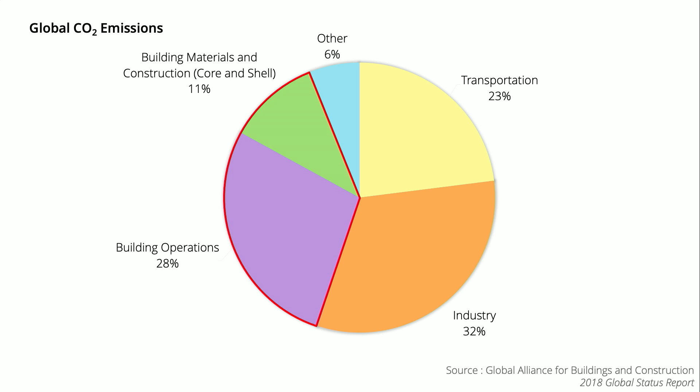The construction industry currently accounts for around 39% of carbon dioxide emissions annually, and 28% of that is operational, and 11% is related to construction directly. And tall buildings require a relatively larger amount of carbon in their construction than lower-rise structures. My question is, how can we justify that? What's the future of tall buildings? Is it reasonable to construct any more tall buildings, or should we consign them to construction history?

I'm going to talk through the history of tall buildings up to now, particularly since their explosion at the end of the 19th century. Then I'll discuss the technology of tall building designs now, and come back to this question with some thoughts about the future.

Tall buildings through history have been limited by the possibilities of the structural techniques available at the time. The pyramids in Egypt were the first man-made structures to break through the 100-meter height mark. The most famous were constructed in the 26th century BC, and the largest of them, the Giza pyramid, was 146 meters above ground level. More specific to the theme of towers, the Alexandria lighthouse was built around 250 BC and measured around 120 meters.

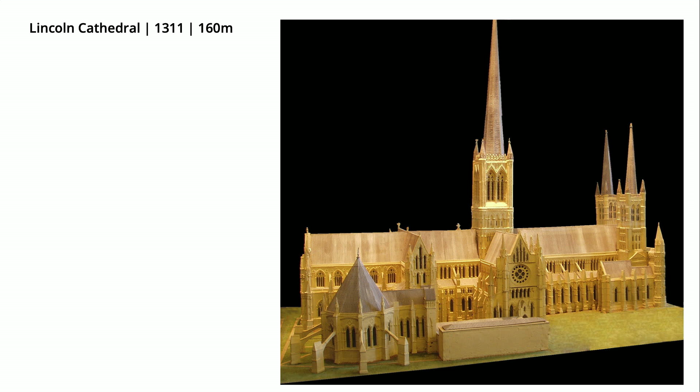It's not until the cathedral construction period of the Middle Ages that these heights were surpassed. And even after all this time, the towers were not radically greater in height from those built more than 1,600 years before. Lincoln Cathedral's spire, built in 1311, was reputedly 160 meters until it collapsed in 1548. Other spires followed around Europe around the same period, all around 150 meters high. Cologne Cathedral was the tallest building in the world at 157 meters in 1880.

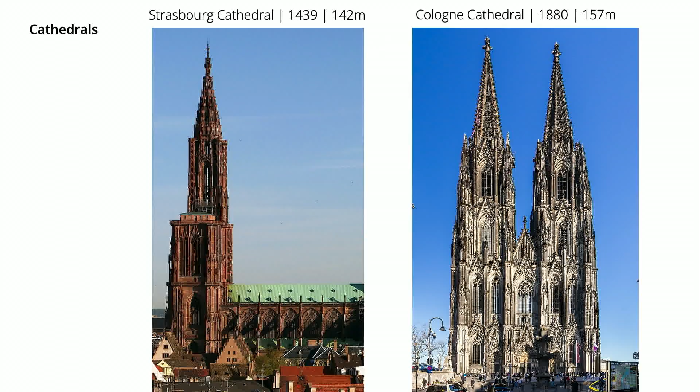And they're all built the same way: out of load-bearing masonry, stone blocks piled on top of one another to create walls. So they're heavy, and their height is limited by three structural factors: the capacity of the stone wall to support itself, the capacity of the ground beneath it to support it, and the stability of the entire structure against the loads acting on it, principally lateral loads.

A further factor limiting the height of any buildings was the difficulty for anybody to go up them. So they were used for power or status or as a beacon, but not for economic reasons, because not very many people wanted to or needed to go that far up into the air.

There were two technical transformations in the 19th century which transformed that. Elisha Otis is the famously known inventor of the elevator. He demonstrated, in the sort of mythology of the invention, a new safety hoist at the exhibition of the Industry of All Nations in New York City in 1854. He was standing on his hoist, the single rope supporting it was cut, and the platform dropped a few centimeters and then stayed where it was.

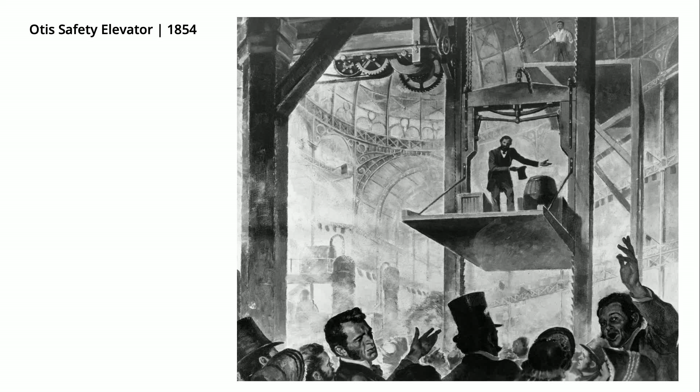So he'd invented a safety mechanism. Plenty of people used hoists before that, but they didn't like the safety implications if they broke. Popular history records this as the beginning of elevators, but the reality is more prosaic. Lots of people around that period were coming up with, using, and trying to invent elevators. Otis, the company, was one of them. Elisha Otis was the entrepreneur who had this one, but many others were involved too. The main point is that during this period, there was a frenzy of activity to fulfill an economic need for people to go safely up buildings.

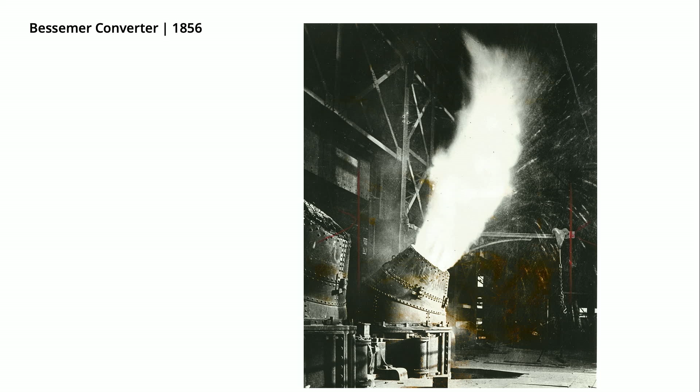The second major innovation of that period was the incorporation of structural steel into the load-bearing structure of buildings, rather than only load-bearing stones. Steel had been around for a long time before this, but the modern era was really invented by Henry Bessemer, who evolved a process, the Bessemer process, in 1856, which dropped the price of mild steel significantly, by a factor of more than 5, and enabled it to be produced more cheaply than wrought iron.

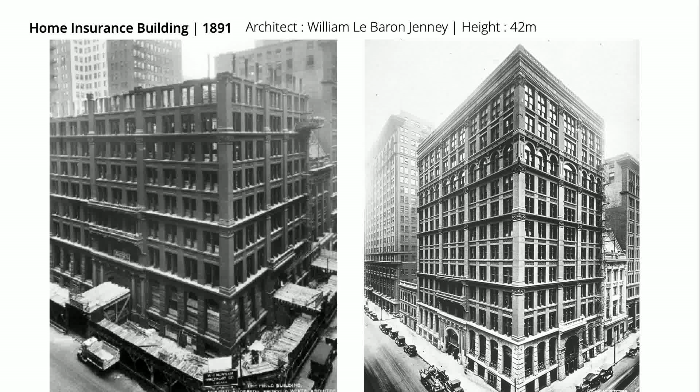And so that really transformed the possibilities of building. Those possibilities manifested themselves first in America, particularly in Chicago, and very soon afterwards New York. So instead of buildings using load-bearing masonry walls, as had been the case up till then, they started to be constructed as a steel skeleton.

So you'll notice that this gets called a skyscraper. It's 42 meters high. This project, the Home Insurance Building, is known as being the first skyscraper, and that's really because of the change in its construction method. But there's a debate about that, because you can see on the left those steels vertically pointing, just coming out of the top of the walls. There was still load-bearing masonry in this skyscraper. William Le Baron Jenney, the architect, built it in 1885, and then some other additions were made.

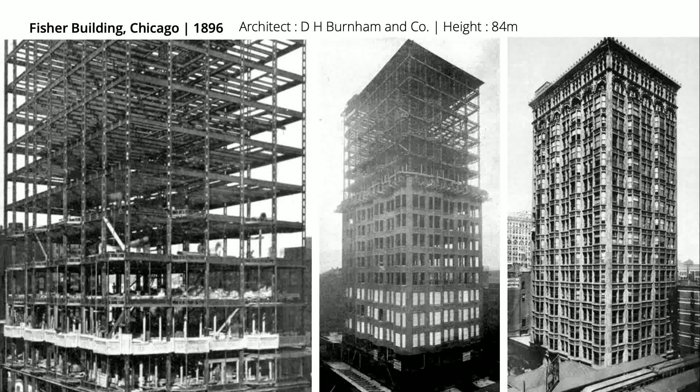But if we look at others around the same period, you can see clearly the fact that there's a steel skeleton, a frame, and then the cladding follows on. So that's a transformation in building technology — instead of building with load-bearing masonry walls, we're now building with a steel skeleton. Here's another one from the same period, the Fisher Building in Chicago, 84 meters, again with a steel frame, and this time plate glass and ceramic cladding.

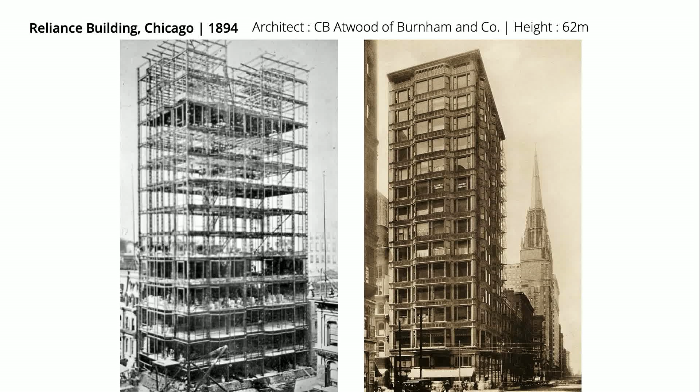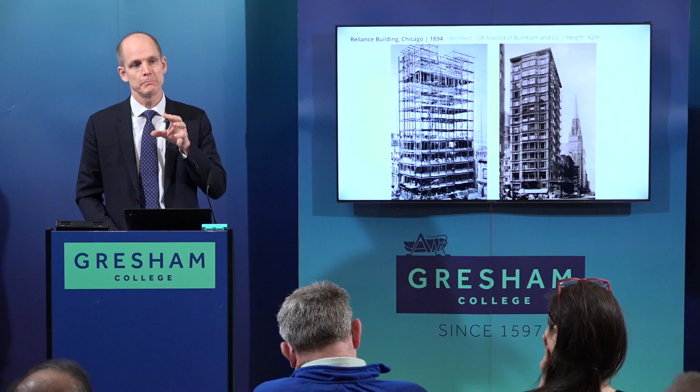So of course those are the technological means, but there had to be a reason for that, and there were very strong economic drivers in that period. Chicago and New York were growing extraordinarily fast, and land values were increasing very quickly. In New York, land values doubled between 1840 and 1870, and at the same time there was a big economic benefit in density and in staying close to the coast. In 1816, it cost as much to transport goods 30 miles inland as it did for those goods to cross the Atlantic, so there was good reason to stay near the coast.

So as quickly as tall buildings arrived, a philosophy of their construction and design was developed. This is a quote I really love from Louis Sullivan, a very famous architect, one of the pioneers of the modern movement and one of the most forward-thinking architects of his generation. He wrote a piece called 'The Tall Building Artistically Considered' in 1896, in which he said: whether it be the sweeping eagle in his flight, or the open apple blossom, the toiling workhorse, the blithe swan, the branching oak, the winding stream at its base, the drifting clouds, over all the coursing sun — form ever follows function, and this is the law.

That's how people wrote about architecture in those days, and we all really bear in mind that it's a phrase that has lived on ever since then. But it's just interesting to see where it originally came from.

Louis Sullivan built some fantastic skyscrapers, but form hasn't always followed function in the evolution of skyscrapers, or in fact other buildings since then. I'm not going to go through the whole history of skyscrapers, but suffice to say that's not always the case — there's not always a clear identity of the skyscraper with its function. Maybe the climate emergency is one way to recenter that, to measure the impact of departures from the most efficient structural response for a particular design.

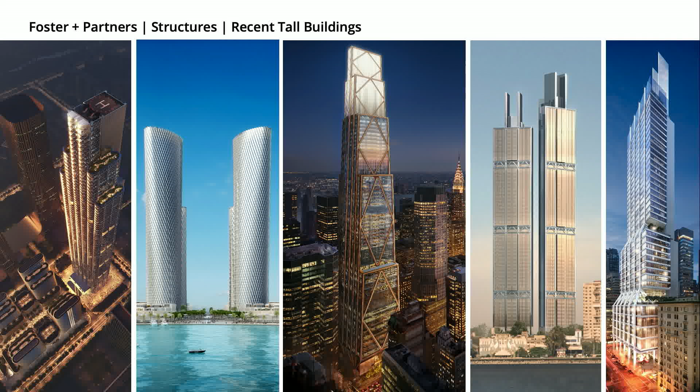So we've designed structures either at competition-winning projects or through to completion around the world, and I'm going to show some of the principles of tall building construction with some of those as examples. These are the Lusail Towers in Doha, designed by the practice and completed for the FIFA World Cup in 2022 in Qatar. They're four towers arranged in two pairs, 257 meters and 300 meters tall.

We build, in the structural team, cardboard models — this one is around a meter or so high. The idea of these cardboard models is they show the structure alone. We remove the cladding so that we just see the skeleton of the building, because we want to make structures which are logical and efficient and don't need to be hidden or have anything to cover them up. We want to see them and make them beautiful.

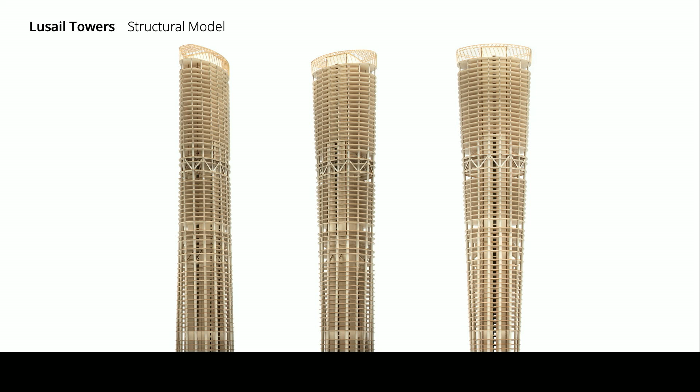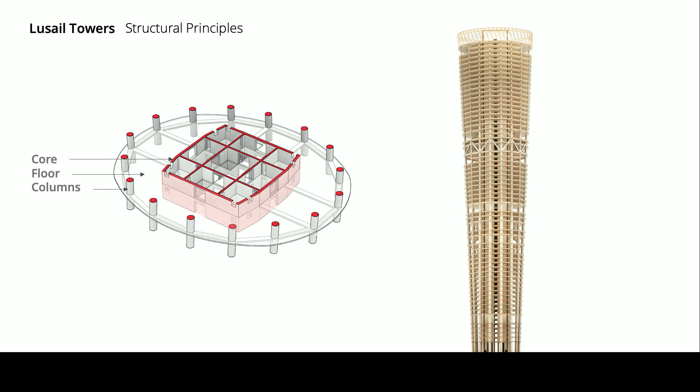If I focus on this tower, a tall building is a cantilever fixed at the base and subjected to both vertical and lateral loads. The vertical loads are primarily due to the building users, and the lateral loads are due to wind and also earthquake loads, the shaking of the ground, which is mostly horizontal. Those forces are carried down by the structure to the foundations.

The most common way to resist the lateral loads in modern buildings is by using the building's core. You can see in this axonometric section the core in the middle. This is the part of the building which contains the vertical circulation, the stairs and the lifts, and also quite often the spaces needed to put the mechanical services into the building.

But above a certain height of a building, somewhere between 150 and 250 meters—there's no absolute rule, it depends on the building structure and the loads acting on it—the core isn't enough. The building's too tall for that. At that point, we need to mobilize the outside of the building, using the full width of the building to resist the lateral loads acting on it.

This is one method used quite often, which is to install trusses, which we call outriggers, which link the core to the outside columns in order to get the full stiffness and strength of the columns around the perimeter.

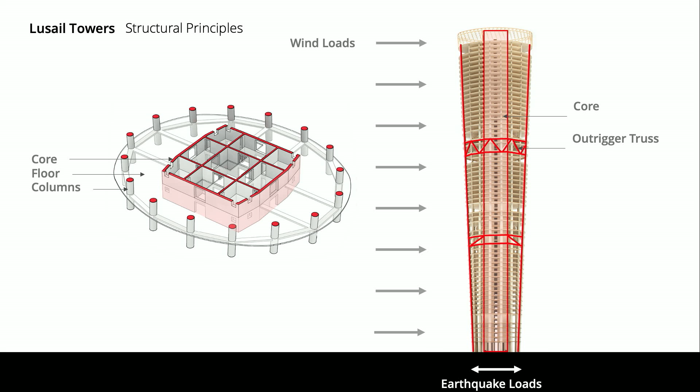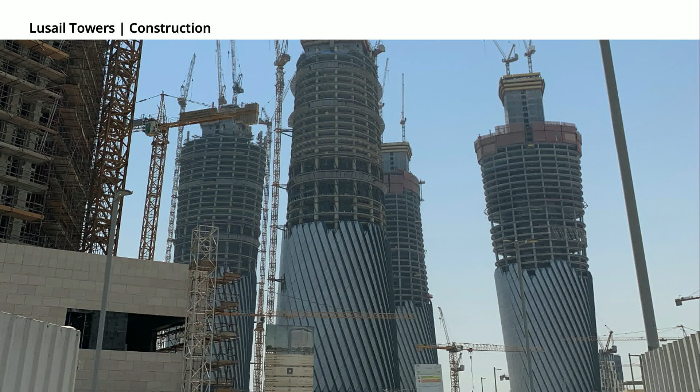So these are the Lusail towers under construction, and you can see on the right-hand side the core, built in reinforced concrete, coming out of the top of the towers, and then the floors and the columns following on.

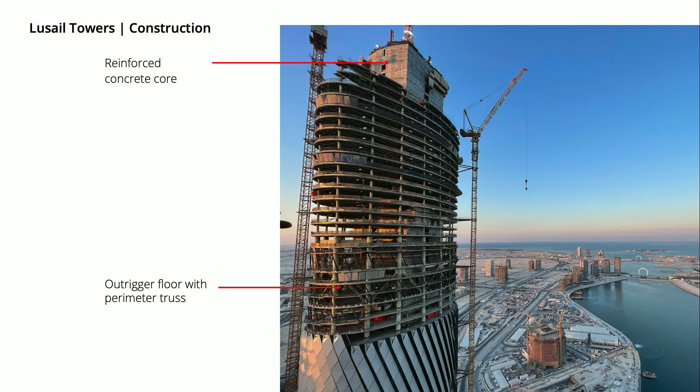So another tower now in New York, 425 Park Avenue. This is, as you can see, in Manhattan, just off the top of Park Avenue, quite near Central Park. This is a competition that we won in 2012.

Tall buildings in Manhattan are required to fit within a tapering volume defined in planning rules, which gets thinner over the building height in order to allow light to penetrate down between the buildings to the streets at ground level. As well as that, the client wanted to move the vertical circulation, the core of the building, away to the side rather than being in the middle, so he'd get a whole floor plate addressing directly Park Avenue, with the core pushed to the back.

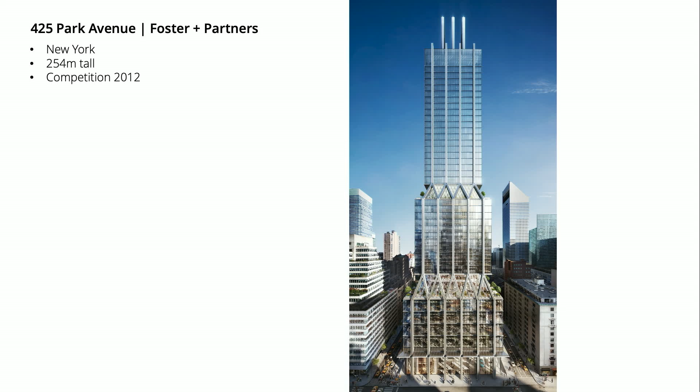A single line of columns, which I've picked out in red, starts at the top of the building, and it bifurcates twice. It divides into two, and it also goes back to the core behind. You can see at those two levels those diagonals. In bifurcating at those levels, the columns connect with the core behind.

You can see in the side elevation on the right-hand side that those diagonals are connecting back to the core. What that does is the same thing the outrigger was doing for Lusail Tower, which is connecting and mobilizing the full width of the building to resist lateral loads, which in New York—which isn't seismic—is particularly wind.

So I'm going to show you what that means in terms of the forces acting on the building and therefore the reacting forces inside the structure. On the left-hand side, you can see a side elevation, and in red are the compression forces coming down the columns on the front. The gray is the building core, and the red is the compression forces in the columns. You can see them gradually increasing further down towards the bottom, splitting in two every time they meet a bifurcation point. To the right of the cardboard model, you can see the overturning moment—the bending moment which the building has to resist when the wind blows to the side.

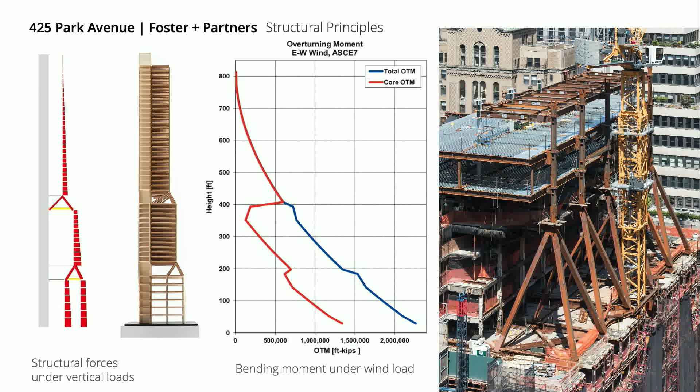So the wind is blowing, and the building, working as a cantilever, has to resist that load at the base. You can see that line starting at 0 at the top, up at 800 feet, and gradually increasing. The blue line shows the total moment, which reaches a maximum at the bottom, and the red line shows the moment being resisted by the core. About halfway up, particularly at 400 feet, those diagonals are effectively splitting the load between the columns and the core, so they're working as an outrigger. We found this a very exciting graph because it showed that our structure was working as we wanted it to—dividing the load between the core and the line of columns to make it efficient.

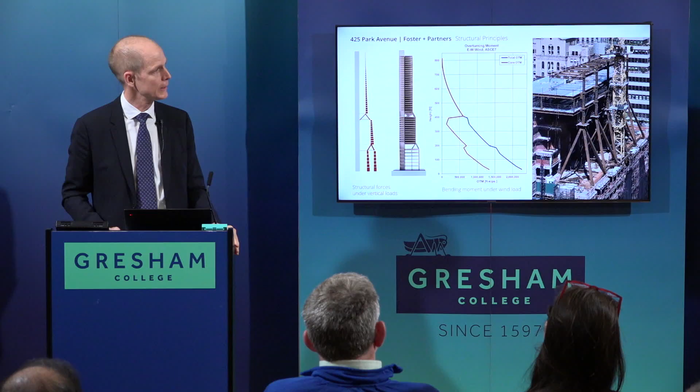It's always encouraging when a competition scheme is what actually gets built. You can see on the right-hand side the construction of the tower going up, with those columns bifurcating. This is the finished structure from the front—the first view you saw was a photo montage from the competition, and this is from the side. So again, to reiterate, we're looking for buildings where you could take the cladding off and the structure would look exactly the same as it looks from the outside.

The final tower that I want to show of ours is in Shenzhen. It's under construction at the moment, and it's 388 meters high, so one of the tallest buildings being built in Shenzhen at the moment. It has some associated buildings around it on the same site that we are also designing.

The stability for this building is provided by a combination of the core—the reinforced concrete core, which again is off to the side in order to achieve big usable floor plates, you can see that on the left—combined with external columns around the perimeter of the tower, which you can see immediately over to the right. Those are linked to the core, so there's a connection once again with trusses, which we've brought out—five lines of trusses and perimeter structure—in order to make a combined system to resist the loads.

And there's another part of the loads that need to be resisted in Shenzhen, which is true of a lot of the world but just happens not to be true in the UK or most of the East Coast of the States, which is that it's seismic. It has significant seismicity, and that horizontal shaking load imparts an enormous amount of energy into the building.

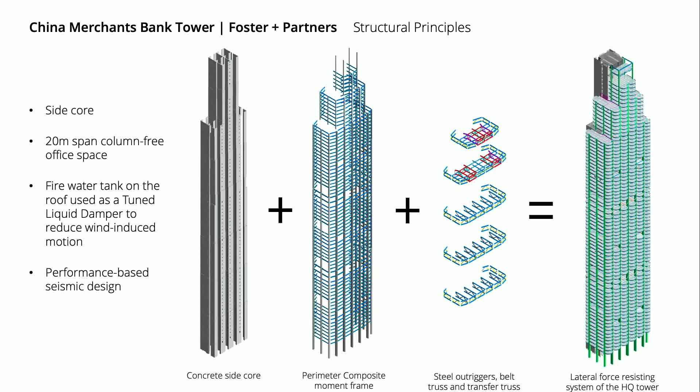So we've used a technology called buckling restrained braces, which form part of those trusses and absorb the load. Our ability to analyze towers now has really advanced substantially, and we can now do what's called performance-based design, meaning we can analyze the behavior of the building under specific earthquake events. This is a particular earthquake which has been modeled and then applied to the building, at a slightly exaggerated scale, so we can investigate the building's behavior under that load.

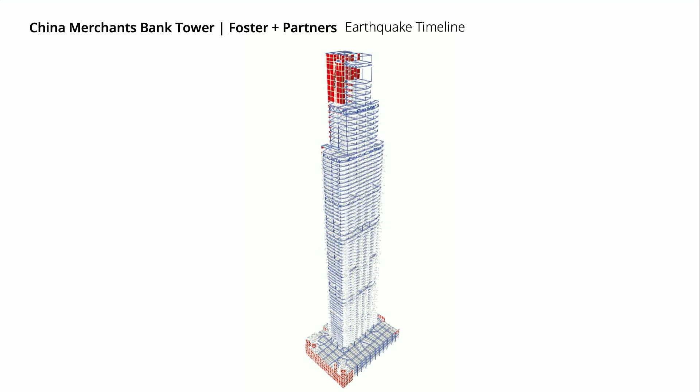And here the building is on site—you can see it on the right-hand side. Once again, the concrete core going up ahead, and the perimeter columns you can see being built, with the floors behind them.

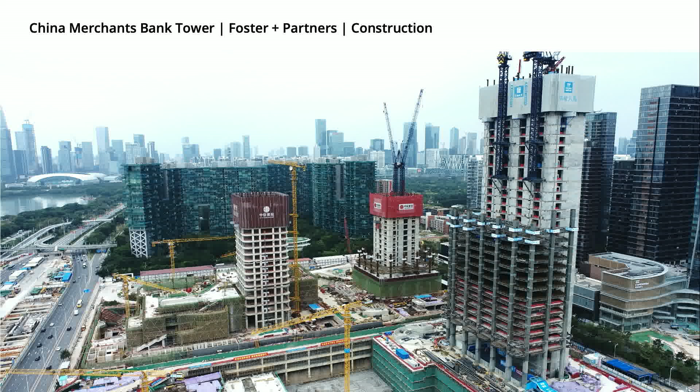So I want to now move back to the original question that I asked. That's a brief synopsis of the technology we use in our design approach to tall buildings, which is really our design approach to all buildings. The original question: how does the technical capability that enables buildings like this to be built fit with a climate emergency and our need to drastically, radically reduce the production of greenhouse gases? This is a debate which is ongoing in the construction community, and understandably, there are strongly held feelings about it.

Most carbon dioxide emissions result from the combustion of fossil fuels—not all of them, which is something I'll touch on—but most come through transport and industrial processes requiring high temperatures, for example 1500 degrees for the manufacture of steel or cement.

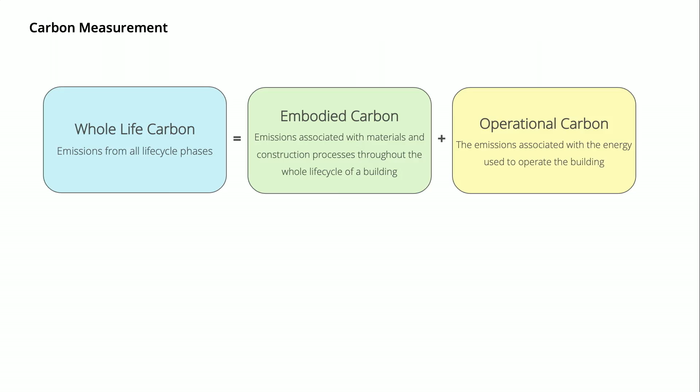We measure the whole life carbon footprint of a building as a combination of the carbon produced during construction, which is the embodied carbon, and the carbon produced during use—heating, cooling, lighting—which is the operational carbon. Improvements in operational carbon, like insulation and better power usage in modern buildings, have reduced operational carbon a lot. What used to be not so seriously considered, maybe 10, 15, or 20 years ago, embodied carbon has now become a much more substantial percentage of the overall carbon footprint of a building.

There's a second factor to consider when thinking about buildings: their users. This is a measure called the household carbon footprint, which is the impact of the building users—the greenhouse gas emissions required to produce, distribute, and dispose of all household consumption over a year. This is what economists use more often than the carbon definitions used in the engineering and architecture world of whole life carbon.

Here is an estimate of the household carbon footprints of residents, from a study of 31,500 zip codes across America. They haven't measured all of those individual users; they're using national survey data to predict consumption, taking various factors and predicting the average household's consumption.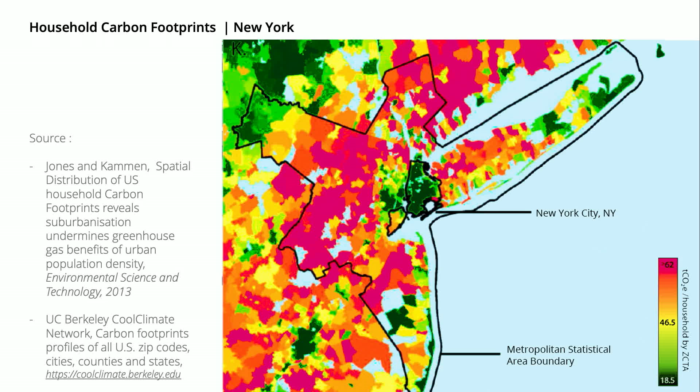Transportation carbon footprints are around 50% higher in large suburbs compared with large principal cities, while the total carbon footprint is around 25% higher.

I use the States because they're incredibly good at gathering and publishing statistical data. These results hold true for other countries like the UK, maybe with slightly lower carbon footprints, but not substantially lower, and considerably more than other countries.

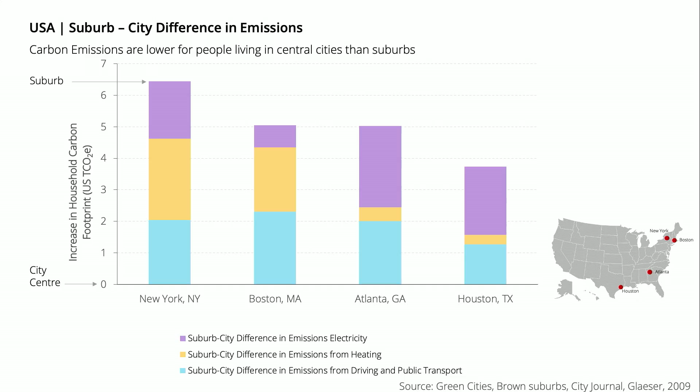Heating is largely natural gas in the States, in the northern states, and electricity is quite a lot due to cooling. So cities in the south use more electricity because they're using more cooling, air conditioning, and cities in the north use more gas for heating, but all of them use more transport than in the city center.

A final study, just to show that other countries have the same phenomenon. This was the same question studied in Australia by Colin Beattie and Peter Newman for 4,000 living spaces across detached, high-rise, and low-rise housing in Sydney, Australia.

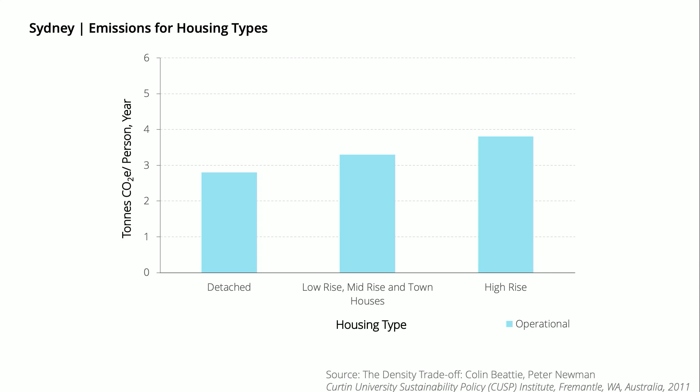You'll see that there's a slight variation in their operational carbon. It hasn't taken into account embodied carbon. But once you add transport on, once again, transport is the defining feature. Private transport in low-density areas is the driver of their high carbon footprint.

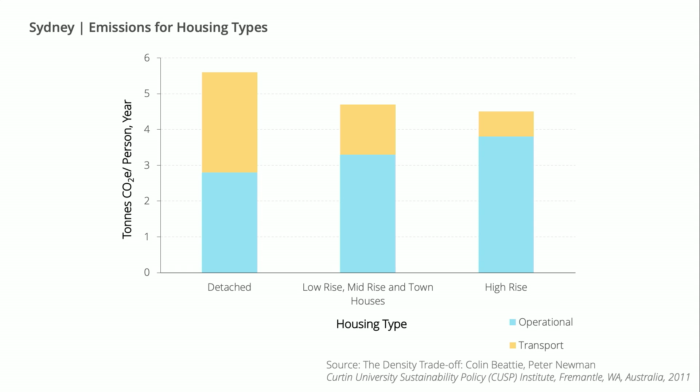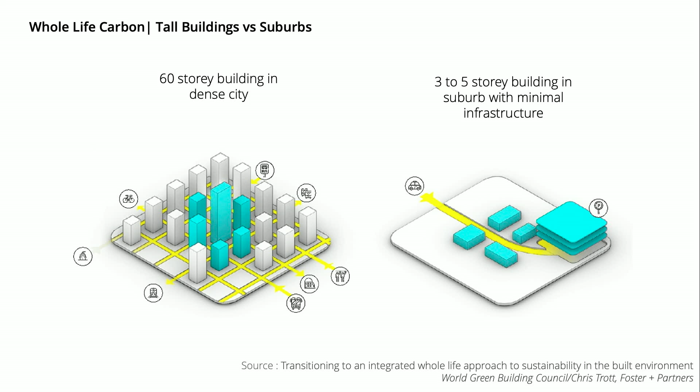The final study I want to show is one we carried out ourselves, the sustainability group in Foster & Partners, led by Chris Trott. That was a study which combined operational energy as well as embodied carbon, and did a comparison for 2 projects. One project is a tall tower in a dense city, 60-story, with very good public transport connections. The other is a 3 to 5-story building development in a low-density area, primarily used by private transport.

This is projected over a 60-year lifespan of a building - that's a point we can also discuss. But the point is that actually refitting those buildings, the fit-out, all the finishes you put in, and then stripping those out and doing the same thing several times over the building life, has a huge effect on its embodied carbon.

In this study, Chris Trott and his team assumed a 10-year period between each refit. When you think about that for people's houses and offices, that's a kind of reasonable average - not particularly high, people do fit-outs more often than that. I should say these graphs also include, for future electrification, both material production and transport - they're not just a snapshot taken today.

So you can see that the tall building does have a higher embodied energy and whole life carbon than the low-rise building, 43% higher in this study. However, the story changes significantly when we incorporate transport. Once again, private transport for the low-rise development changes the story, and the overall carbon footprint in that low-rise development is higher.

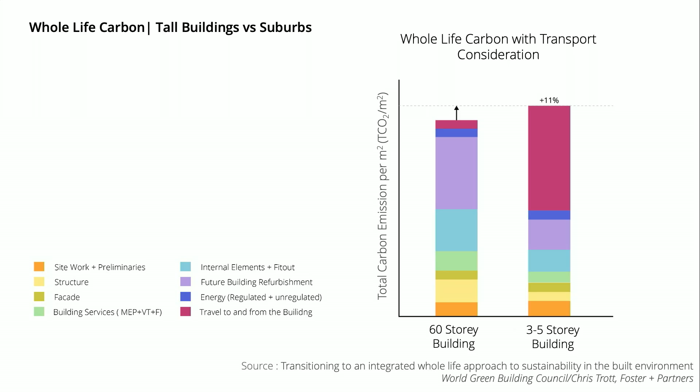Tall buildings enable urban density, at which point public transport becomes economically viable and local travel distances become shorter, so walking and cycling becomes possible. And the benefits of density and working in close proximity are substantial for the economy of a country.

We often see this in a different way. We think about the value of our houses or the cost of living in a city, but it's worth bearing in mind that the productivity of a city is systematically higher than low-rise areas. In the United States, workers who live in big cities earn about 30% more than workers who don't, and the productivity of cities with over 1 million residents is more than 50% higher on average than that of smaller metropolitan areas. So my point is, the cost of living is often discussed, but the productivity of cities, and their contribution to the economy, is higher.

And this gap is true both in developed countries and less developed countries. Really my point here is there's no absolute reason for it to cost more to live in a city than a suburb. That's because of policy decisions, the supply of new development in cities, and the relatively low cost of private transport compared to public transport when you consider the subsidies made to private transport. It's worth considering that all countries are at different points of their urbanization, and every city started life as a field.

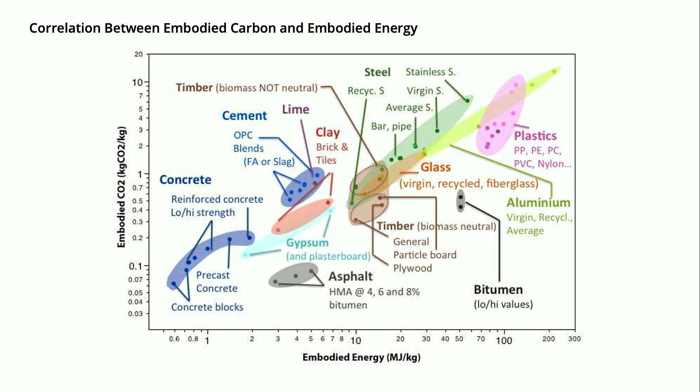Wherever possible, we should be using existing structures rather than taking down structures and building new ones. That's going to reduce our embodied energy. Where it's not practical, where we have to take a structure down, we should recycle and reuse the materials that we remove, and that's an evolving science. But we also need to make buildings that last. A city street can last 500 or 1,000 years, while a building might be pulled down after 50 years, sometimes less, sometimes after 20 years. Our philosophy needs to change — we need to think of buildings as vertical streets, so the functions inside them can change, but the structure can remain.

Now I want to talk about the correlation for materials between embodied carbon and the embodied energy of their manufacture. We need to focus on low carbon materials and use those as much as we possibly can. Since fossil fuels constitute the majority of energy used in material production, it's not surprising that the embodied carbon of manufacture is closely correlated with embodied energy. At the top you can see steel, stainless steel — very high embodied carbon, very high embodied energy — and at the bottom, concrete, which gets understandably a bad press. I'm going to focus on it, but it actually has per kilo a relatively low amount of embodied carbon.

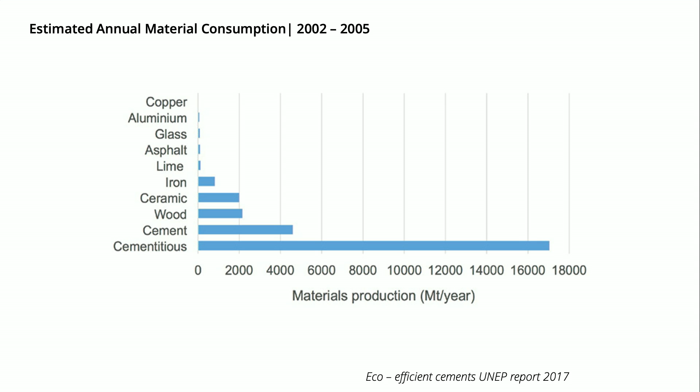So I want to focus on concrete, an area which isn't always focused on as much as it should be. Concrete is strong, durable, fire-resistant and cost-effective, but it is incredibly heavily used. You can see at the bottom of this graph, cement products and cementitious products are by far the most heavily consumed in the world, dwarfing the other materials, and that use is accelerating exponentially — cement-related products' use around the world is dramatically accelerating.

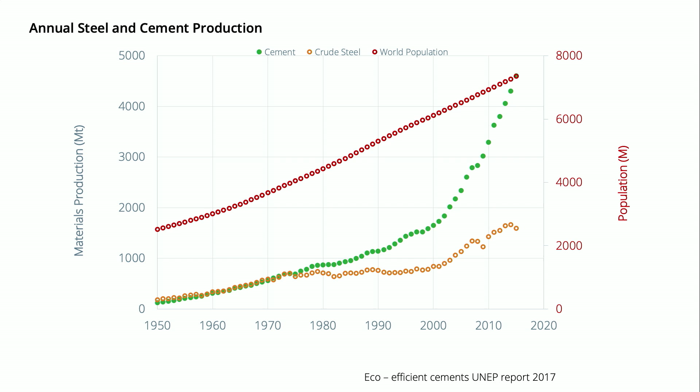Just a word on concrete: it's made of cement, fine aggregates, sand, coarse aggregates about 20 millimeters in diameter, water and air, and then reinforcement when it's reinforced, although a lot of concrete products aren't reinforced. If I compare the volumetric constituents of concrete to the embodied carbon constituents, you can see that 90% of the embodied carbon of concrete is due to the manufacture of cement.

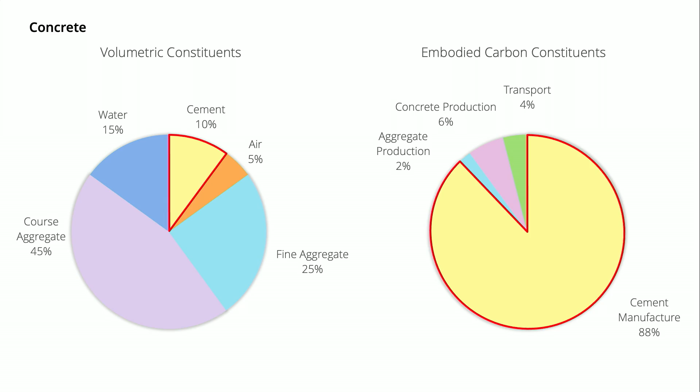There are two sources of carbon emissions from the manufacture of cement. The first is the energy from burning fossil fuels to heat limestone up to 1500 degrees to create lime, driving carbon dioxide away from calcium carbonate to produce calcium oxide, CaO. The second is the carbon dioxide released in that chemical reaction itself — a significant element of cement carbon due to the chemical reaction. This huge worldwide production of cement means it alone accounts for 8% of the world's total annual carbon dioxide emissions.

It's astonishing to consider that this universal material has not really changed substantially since it was patented. It was called ordinary Portland cement, and the word Portland came from the idea that it looked a bit like Portland stone, by Joseph Aspdin in 1824, and then refined a little bit by his son William in the 1840s.

The principal codes in the UK, the Euro codes, the American codes, are all based on this cement type, ordinary Portland cement. But there are two currently additional cementitious materials which are used to mix into that cement, which have various properties, one of which is you can consider that you've lowered the embodied carbon of your cement by mixing them in. One of them is pulverized fly ash, a waste product from coal combustion.

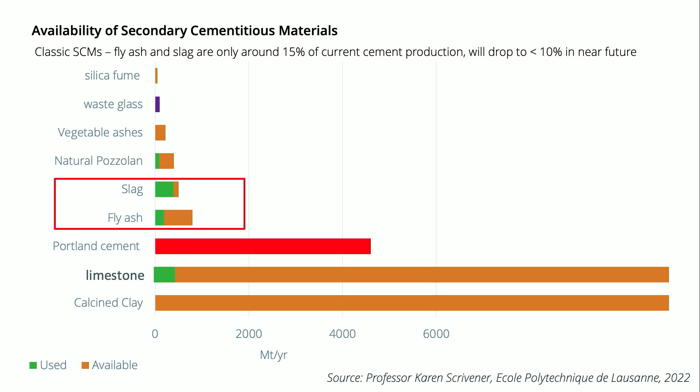And the second one is blast furnace slag, which is the waste product from iron and steel production. Both very high energy processes, but we consider, in the way we count, that the carbon due to that process is already counted in the production of the primary process they were used for. So they're waste products, treated as waste products, and we should use them wherever we can.

But as this graph shows, the availability of them is limited, and it's dwindling, because we're burning fewer and fewer fossil fuels. So we're going to have fewer and fewer of them. And they're fully utilized - it's a scenario of, if you don't use these products in your cement mix, somebody else can use them in theirs. There's not an unlimited supply of them.

But there is another approach, an emerging technology - instead of, or as well as using those two cementitious materials, we can also use limestone before it's been calcinated, before it's been turned to lime, that is, before it's been heated, in small amounts, as well as calcined clay. That's clay with particular constituents - not any clay, there are particular elements which have to be present. But still, there is a huge supply of that all over the world.

And if we use these elements, we can reduce potentially our carbon content of concrete by up to, or even in some cases over 40%. So that's a huge reduction. In my view, we must focus on these materials reductions as well as recycling and reuse, and I don't think this gets as much attention as it deserves.

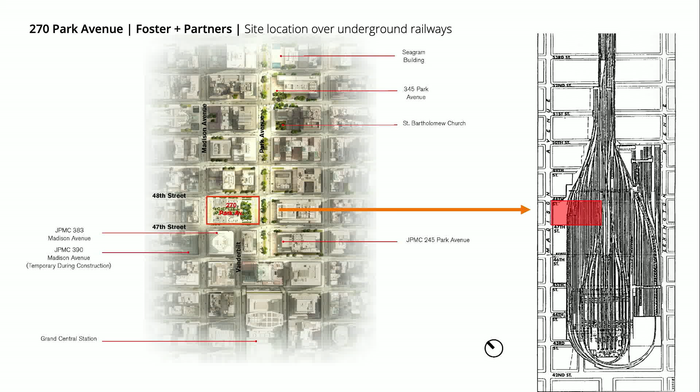On the left is the plan view of Park Avenue, and on the right is the plan view of the basement underneath Park Avenue, where you can see lots and lots of railway lines directly underneath the site. Those railway lines are going into Grand Central Station, further south on Park Avenue. So that's an interesting particular constraint for a building. We were told during the competition that we were given a specific response to where the columns should go down into the ground level in order to respond to that constraint. All teams were given that.

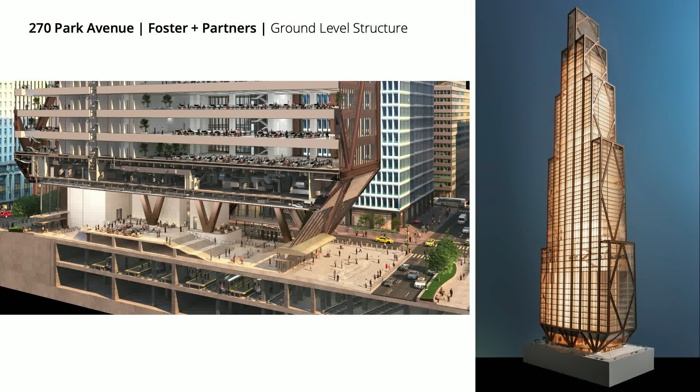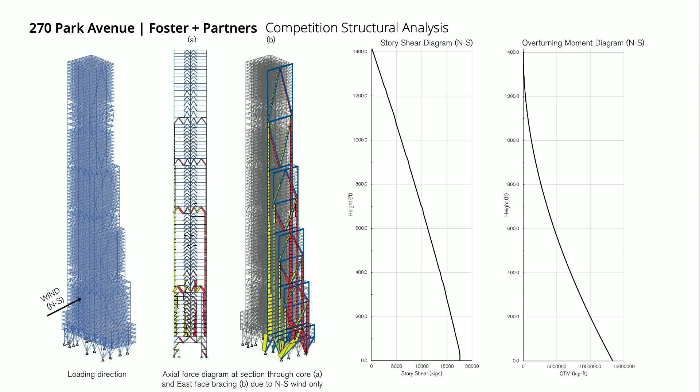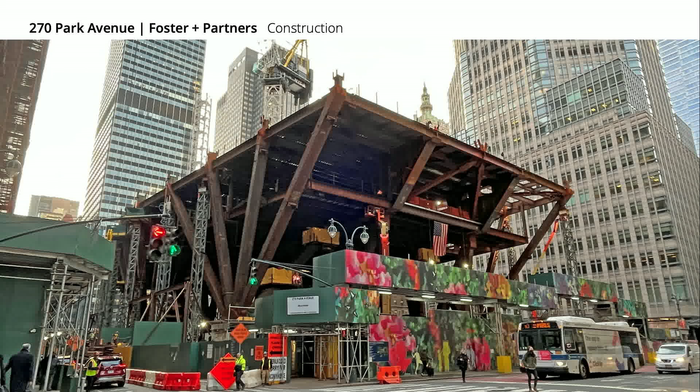That's the view we had at competition stage, and this is what's being built on site. That was a view from a few months back, and you can see exactly the same thing—the fans, the gathered steel columns on the side, and the beginning of that brace at the top.

The building, in addition to this, will be 100% powered by renewable energy sourced from a New York hydroelectric plant. There was an existing, lower building on the site, and 97% of the building materials—finishes included, as well as the structure—from taking down that building were recycled, reused, or upcycled.

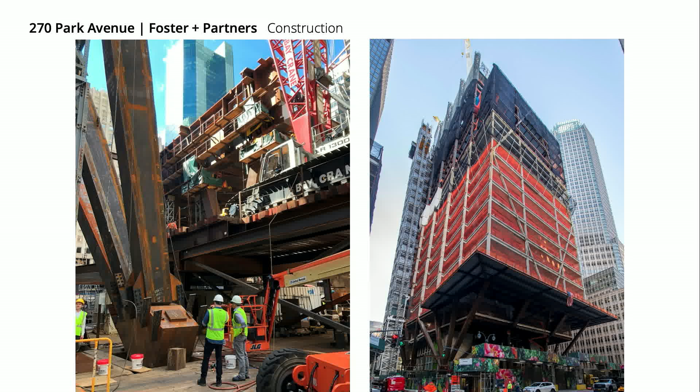To my original point, one of the researchers, Professor Glaeser, said when researching buildings that the only reason you should be allowed to take down a building is if you put a taller one in its place. And to my original point, this building doubles the density of the previous building on the site.

So I hope I've shown in this talk that tall buildings come through a combination of technical innovation and societal need. A tipping point occurred around the second half of the 19th century during a period of rapid growth, and in my view we're at a tipping point now with regards to our climate. We need to build efficiently, reuse and recycle wherever we can, and minimize carbon in our construction. We must consider buildings in parallel with their environment and wider society. Increased density results in overall lower carbon emissions for the same societal system, and creates cities for people to live in and thrive in. Thank you.